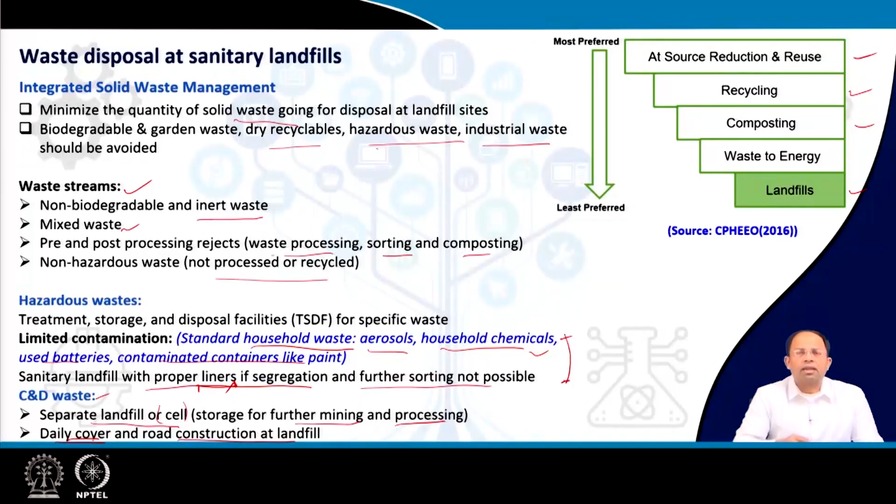We can also use this construction and demolition waste for creating daily covers and road construction at the landfill site. Now, road construction is pretty obvious, but what is daily cover? That means every day when waste comes to the landfill, at the end of each day's operation, we cover that waste using a layer of soil. So, instead of soil, we can use this C&D waste as cover as well. So, that is how we can use C&D waste. So, these are the different kinds of waste stream that go into the landfill site, and our target is, of course, to minimize the quantity of solid waste that comes into the landfill site.

So, coming to the definitions, usually landfill refers to facilities used for disposal of residual solid waste on the earth's surface. In other words, we also call them dump sites, right? Now, the problem with dump sites is, as you can see in this particular image, this is a standard dump site. This is where the solid waste is being stored, and some amount of leachate moves from the solid waste because of more and more waste being dumped on each layer. It presses on it, and moisture also keeps on coming in from rainfall. Some amount obviously infiltrates, and all this water moves downwards and then mixes with the groundwater and contaminates it. So that is what is being shown over here.

Similarly, you can see that this groundwater can actually move and mix with the surface water sources as well, and it can spread to other areas, like it can flow as per the hydraulic gradient, and then it will mix with other aquifers. So all this is a problem, and in this kind of landfill, you will see a little bit of cover given at the top. So a thin native cover using local soil is given at the top, and this is inadequate, and it doesn't prevent water from getting inside. So water will continuously get inside, and it will keep on creating leachate and further contaminating the entire sources of water.

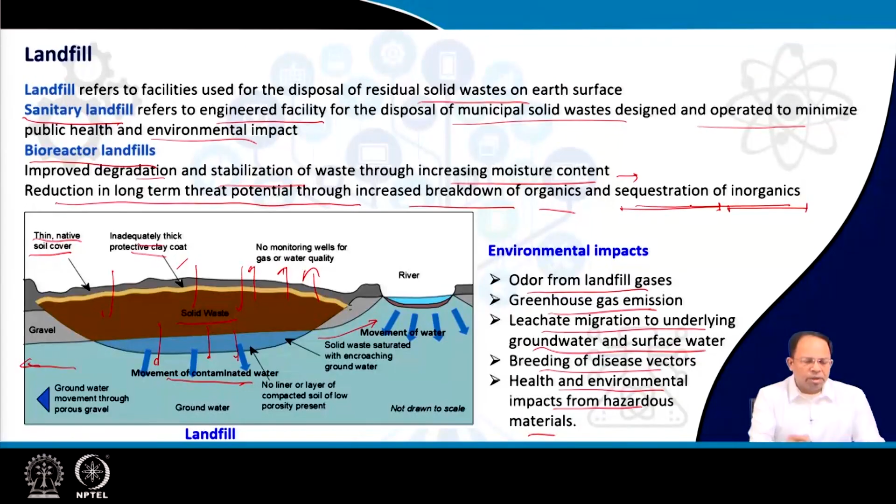Now, coming to a standard sanitary landfill, which is an engineered facility, as you can see this image shows a typical sanitary landfill. Here you can see that we have groundwater, and we are not allowing the leachate to come down and mix with the groundwater. How have we done that? You can see here a compacted soil of low permeability is given. This is called the liner. Liners are provided at the base and at the sides to prevent migration of leachate and gas. It prevents movement of both the landfill gases as well as water to the surrounding areas and also below, right?

Then a leachate management system is installed. What is that? Collection and control facility for leachate. Here you can see that above the liner we have created a drainage layer. The drainage layer is made of gravel and other materials so that the leachate that comes from the top is captured in this layer, and we have open jointed pipes or porous pipes inside this layer which capture that leachate. Of course we give a slope to this drainage layer, and because of this pipe network the leachate can be captured and brought to a particular area.

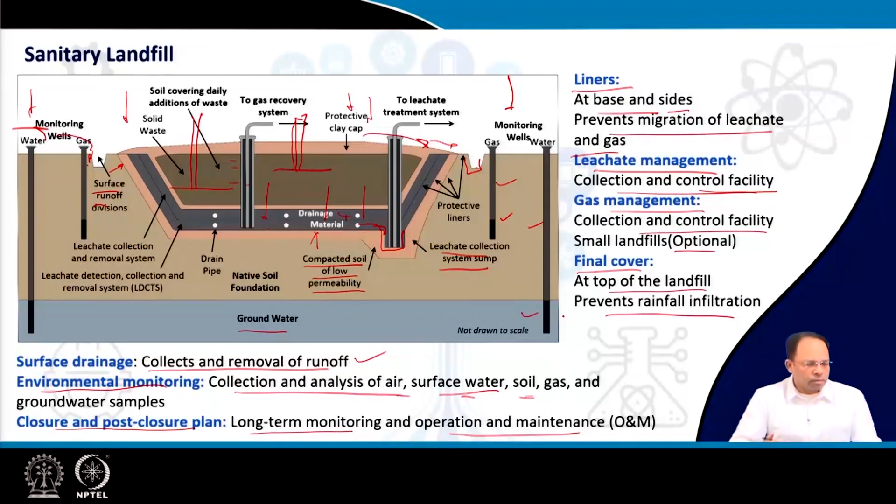And we also have an operation and maintenance strategy so that the clay layer at the top doesn't get damaged, and all this has to be continuously monitored. So we keep on monitoring for roughly 15 years, and by that time the landfill more or less stabilizes, the decomposition is more or less complete, and we can further think of utilizing this particular landfill. So this is what a sanitary landfill looks like.

Now coming to the Solid Waste Management Rules 2016, we have already discussed this in one of our lectures, but we have not talked specifically about landfills. So we will just take you through the points so that you can go through these particular points and see that these are the things that need to be done. For example, the duties and responsibilities of local authorities.

That means as per the Solid Waste Management Rules 2016, you can say as per law also, landfilling or dumping of mixed waste has to stop within a specific period. That means we cannot take mixed waste to the landfill, and we have to keep on reducing the quantity of waste that goes into the landfill. So only non-usable, non-recyclable, non-biodegradable, non-combustible, and non-reactive inert waste and pre-processing rejects and residues from waste processing facilities go into the landfill site. So our effort should be towards a zero waste landfill.

That means the ULB should invest a lot of money in recycle and reuse of rejects so that we can achieve eventually a zero waste that goes into the landfill. But yeah, it will take time. It cannot happen over one day. So we have to give that time, but gradually the municipality should try to achieve this.

So in addition to that, the solid waste management rules talk about existing dump sites or old dump sites and existing operational dump sites, and say that if possible we have to improve them. How we can do that? We can biomine them. That means we have to take away certain garbage from there, we have to treat it, and then we have to do bioremediation. So we have to treat it and process it and so on.

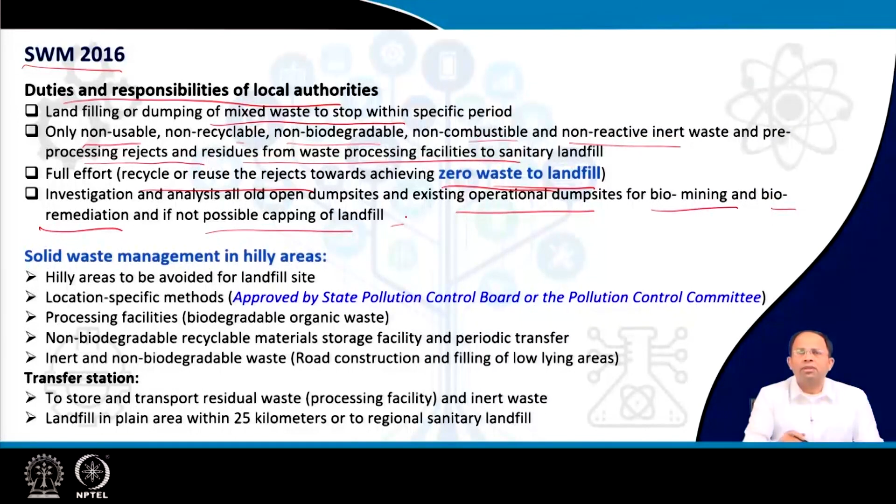And if we cannot do this kind of biomining or bioremediation, because the waste is too mixed, in that case we have to give a proper cap or a proper cover to the landfill so that it prevents further infiltration of leachate or moisture into the landfill, and we give as many protective measures as possible. And also, if we do a proper capping, some amount of gas, say methane gas, could be also collected from the landfill.

Now in hilly areas, everything is more or less same, but there are certain additional considerations. In the hilly area, because of the terrain, we cannot have landfill in a slope, for obvious reason. That means our target should be to have as many processing facilities for biodegradable waste and recycling, and all these other centers can be also set up.

And for non-biodegradable waste, if recycle centers are not able to be set up over there, or we don't have land, in that case there has to be a storage facility, and from there periodically this waste has to be transferred to regional material recovery centers or processing centers. And inert and non-biodegradable waste could be used for road construction and filling of low-lying areas in this hilly region.

And this transfer station, as we were talking about earlier, is to store and transport residual waste to a processing facility, and inert waste, of course. So this finally goes to the landfill site, and the landfill could be located within a 25-kilometer radius, but it should be in a plain area. And if it is not available, then a regional sanitary landfill facility also could be considered.

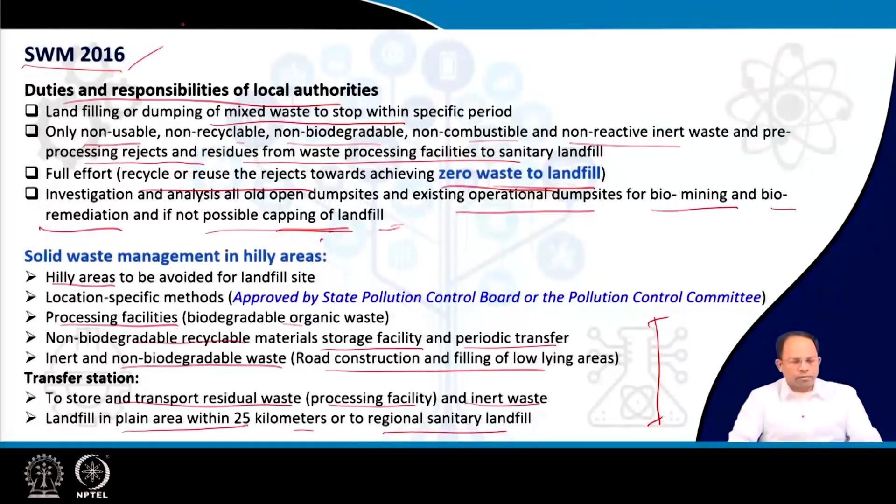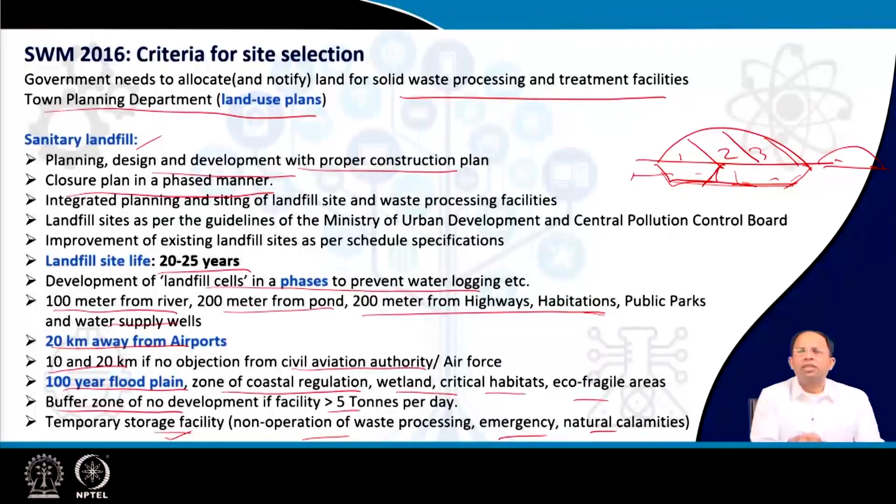Finally, we have to create buffer zones if the amount of waste that we deal with is more than 5 tons per day. And a temporary storage facility is also required in the landfill site, so that in case of stoppage of operation because of reasons like emergency, natural calamities, non-operation of waste processing centers, this facility can temporarily store the waste before it moves into the landfill site.

So what are the different kinds of facilities that should be provided in the landfill site? First of all, entry should be monitored and controlled. We don't allow unauthorized access or movement of stray animals inside the landfill site. Similarly, all records should be maintained. Waste received, processed and disposed, all these records should be maintained and we should have an office for that.

In addition, we should have provision for weighbridge, fire protection equipment, drinking water, sanitary facilities. Nighttime working should be allowed, and that's why there should be adequate lighting. Then safety and health inspection provisions for the workers, so there have to be certain centers for that. And finally, provision for parking, cleaning and washing of transport vehicles and treatment of the water generated from this activity. These are some of the facilities that have to be provided for a landfill site.

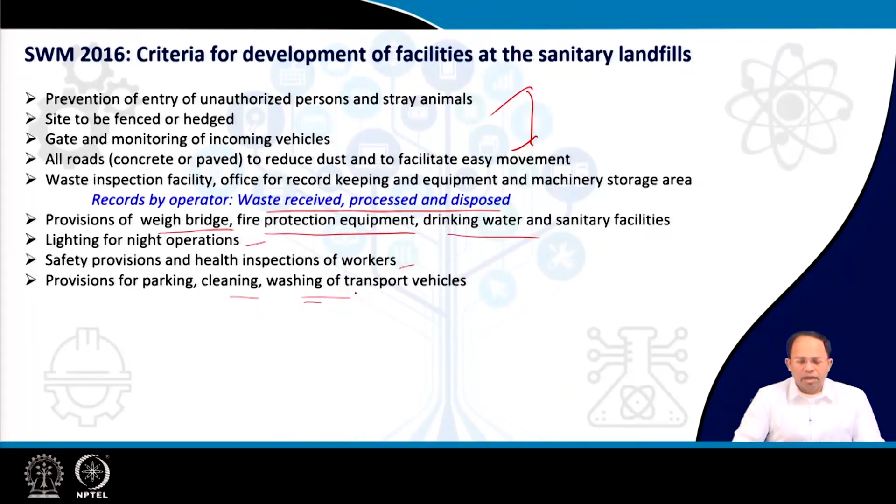Finally, criteria for specification of landfill operations and closure. That means how do I operate and how do I close the landfill? We have more or less discussed all this. We have to compact the waste before I put it inside the landfill. It should be done by heavy compacting equipment like bulldozers. We press the garbage into the site.

But the problem is, in rainy areas, these compactors will not be able to work. So we have to make alternative arrangements. Maybe I do the compaction earlier through compactor vehicles and then bring only the compacted waste to the landfill site. The landfill should be covered at the end of each day with 10 centimeters of soil or inert C&D waste, as we have discussed earlier.

Before monsoon, we should put an intermediate cover. A thicker cover is provided so that water doesn't get inside the waste, around 40 to 65 centimeters thickness. And the other things we have discussed, like drainage to divert runoff, and finally a barrier cover at the top. We have discussed the reason for providing a barrier cover, but here some specifications are given in the rules.

For example, it should be 60 centimeters of clay or amended soil. Amended soil means soil mixed with cementitious material with permeability coefficient less than 1 × 10^-7 centimeters per second. That means it should not allow water to pass through. Plus a drainage layer of 15 centimeters on top of the barrier layer. Why this drainage layer? Because at the top there is a vegetative layer of 45 centimeters.

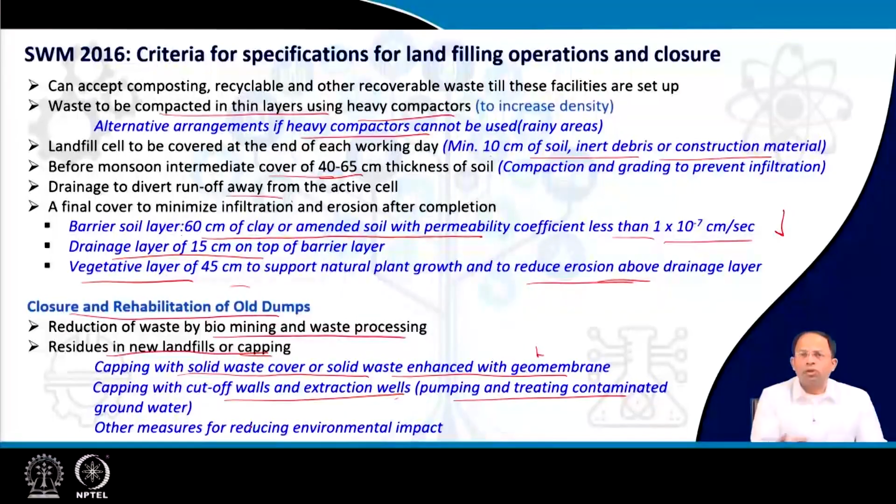Capping with cut-off walls and extraction wells, so that we may need to pump and treat the contaminated groundwater, because there is no bottom liner in this particular case. And finally, other measures for reducing environmental impact also need to be considered.

Now, in general, the new landfill design specified by Solid Waste Management Rules 2016 talks about prevention of all sorts of pollution. So, first we have to create a proper drainage system for draining the stormwater, so that we prevent it from mixing with the leachates, and of course this will prevent the pollution of surface waters, because during certain rainfall events there may be some amounts of flood, so this could be prevented.

And we have to create a non-permeable lining system at base and walls, a liner of composite barrier as we discussed, 1.5 millimeter thick high density polyethylene, HDPE. This is a geomembrane, and we can call them geomembranes or geosynthetic liners. And this is above another 3 feet or 90 centimeters of soil, which is clay or amended soil, having low permeability of 1 into 10 to the power minus 7 centimeter per second. So I have got a soil layer and then a geomembrane above it. So this is 3 feet and this is that geomembrane of 1.5 mm.

So this is the design of this liner. So there are different designs. We will discuss that in detail later.

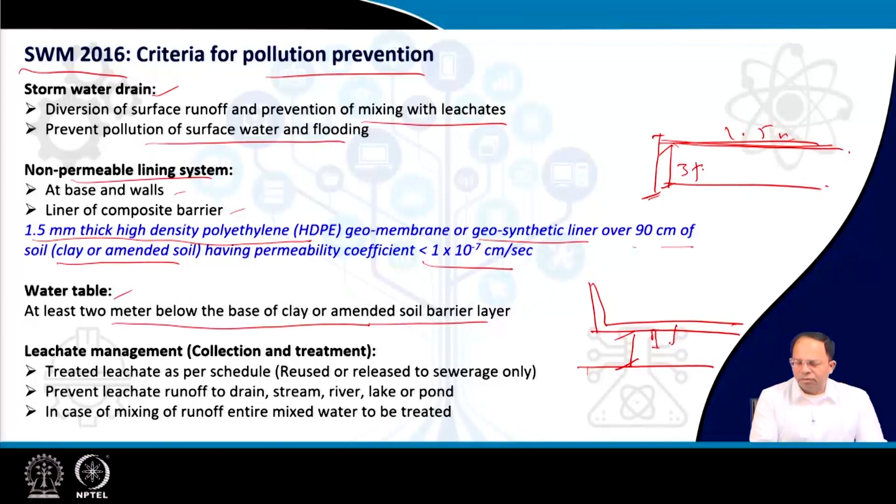We should be very careful about the water table, at least 2 meters below the base of the clay or amended soil barrier layer. There could be multiple liners, so let us assume there is one liner. So at least a 2 meter distance has to be maintained with the groundwater table. Otherwise, whatever liners you give, there will be some amount of leachate which goes down. So we create an additional barrier.

Then leachate management has to be done, which is nothing but collection and treatment of leachate, and some could be reused, and otherwise it has to be released to the sewerage network after treatment, of course. But it cannot be directly let out as runoff to drains, streams, lakes, or ponds. And in case it somehow gets mixed with the runoff, the entire mixed water needs to be treated. So we have to be very careful about both leachate as well as the surface runoff in site areas so that they don't get mixed together, and if they get mixed together, we have to make provisions for treating them.

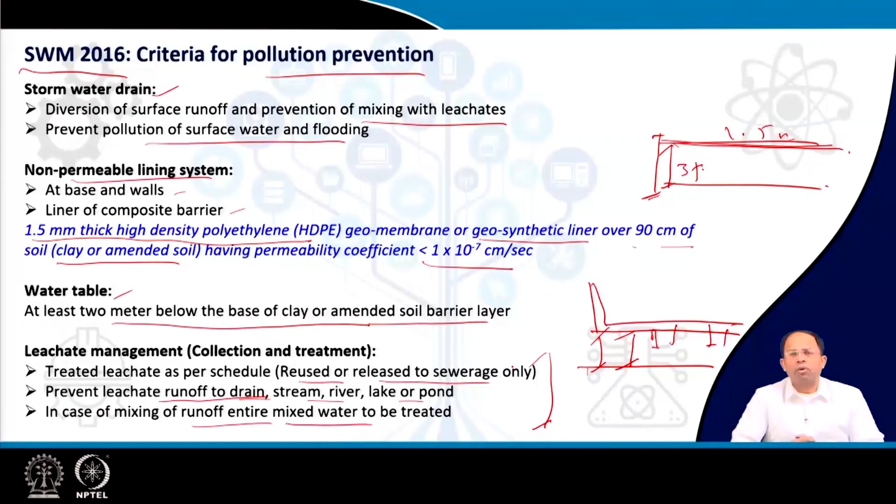Finally, these are the criteria for water quality monitoring and ambient air quality monitoring. Groundwater quality at the periphery of the landfill, to a distance of 50 meters, has to be periodically monitored, particularly in summer, monsoon, and post-monsoon seasons. And we have to have baseline data on groundwater quality so that we can understand what kind of contamination is happening. If I get the baseline, then I can compare the current observation with the baseline.

And these are some of the standards. As you can see, we measure for arsenic, cadmium, chromium, copper, cyanide, and so on. Similarly, for landfill gas or air quality monitoring, we have to have a landfill gas control and collection system. This reduces odor and off-site gas migration, protects vegetation, and geomembranes enhance gas control and collection.

And we have to make sure that the total concentration of methane gas, CH4, a result of the decomposition process along with CO2, both greenhouse gases, is below 25% of the lower explosive limit. Why? Because methane gas is highly flammable, and if you are not taking care of it, it may get accumulated. So it will remain there, accumulate, and may actually create an explosion that may lead to loss of human lives. So that's why we have to be careful.

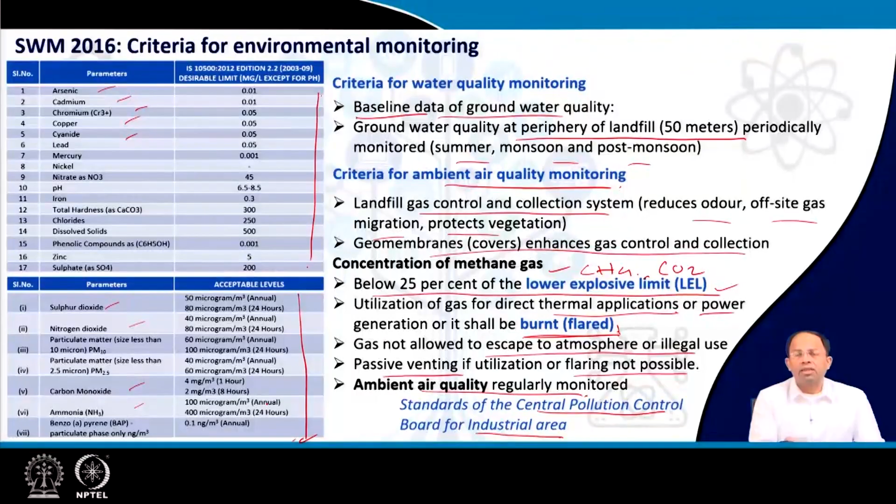In addition, ambient air quality standards are monitored. These are standards created by the Central Pollution Control Board, and because it's considered an industrial area, these are the standards that we consider: sulfur dioxide, nitrogen dioxide, particulate matter PM 2.5 and PM 10, carbon monoxide, ammonia, benzopyrene, and so on. These standards are given, and the levels monitored should be within acceptable levels.

Some other criteria: plantation at the landfill site. As we discussed, the top cover should be done, and after that we can have a vegetative layer at the top. Plant selection should favor locally adapted, non-edible perennial plants resistant to droughts and extreme temperature. Plant roots should not penetrate more than 30 centimeters, because if they do, they will create holes in the top barrier layer and water will percolate. So the plants should have very shallow root systems and the ability to thrive on low nutrient soil.

These are the criteria for selecting these plants, and in addition to the plantation, which helps in prevention of erosion at the top cover, we also have green belts around the boundary of this kind of site.

And finally, post-closure care. Once the landfill operations are done, we have to put the final cover, the vegetation layer, all these things. But we have to keep monitoring it for at least the next 15 years, because this is when decomposition will gradually happen. There is subsidence of the landfill, and because of subsidence cracks may appear, allowing water inside and creating further leachate. So the integrity and effectiveness of the final cover needs to be checked from time to time. Monitoring of the leachate collection system, groundwater, and landfill gas collection system has to be done.

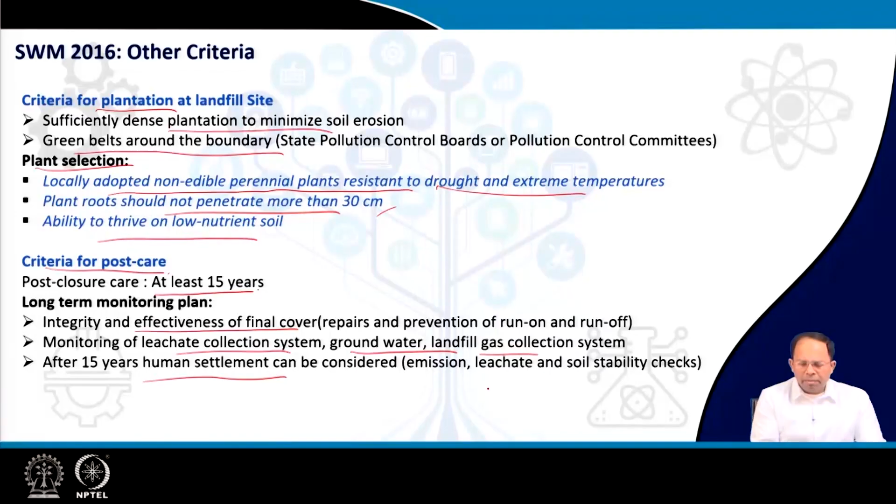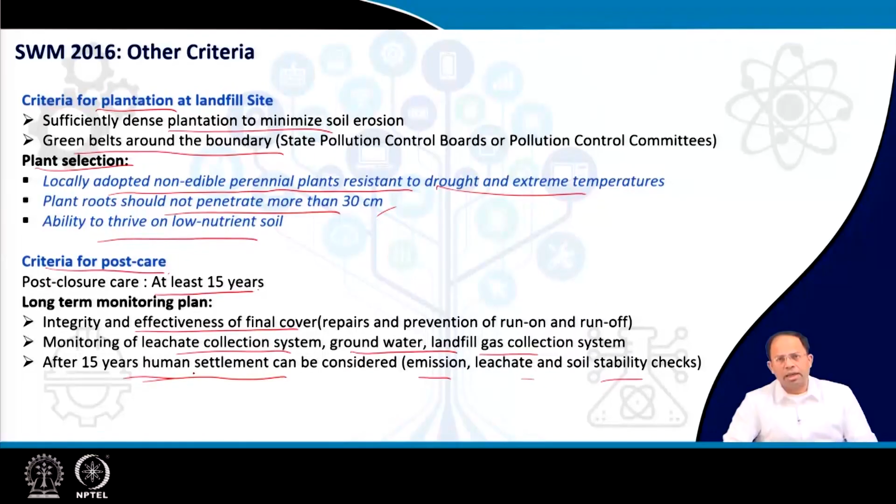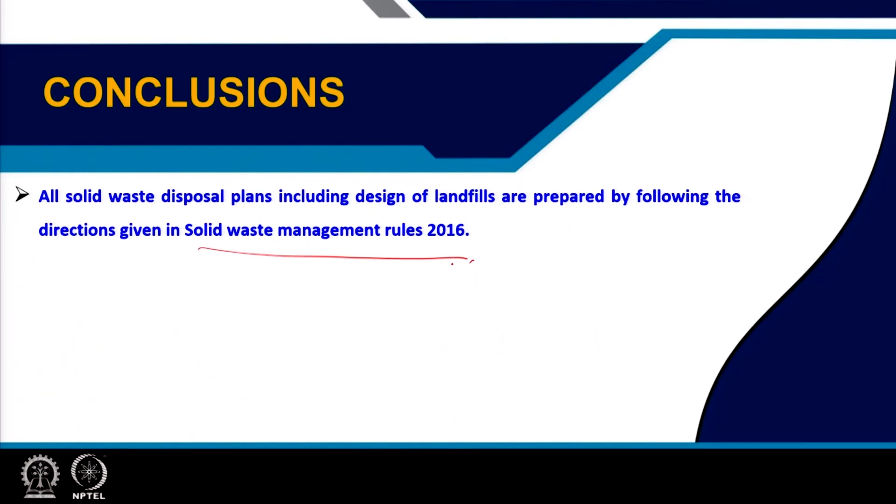To conclude, all solid waste disposal plans, including designs of landfills, are prepared by following the directions given in the Solid Waste Management Rules 2016. As you have seen, we have discussed the rules today. Every area has to follow these rules.